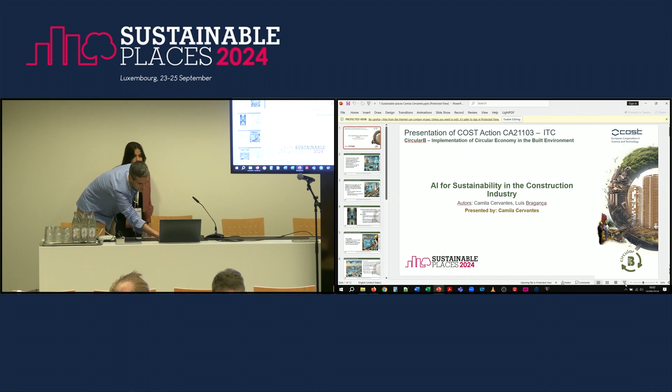Hello everyone. Today I am going to present AI for Sustainability in Construction Industry. My name is Camila, I am a research assistant at University of Minho. I am part of the CircularB COST Action too, so I am here for the cost action for circular economy in the built environment.

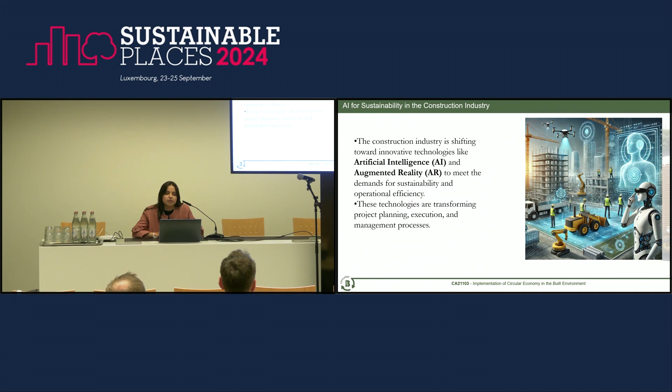The construction industry is now in development, and we want to join AI with AR, augmented reality, with artificial intelligence, to transform project planning and management processes in the construction industry. This study explores the integration of AI and AR, and the core areas are real-time visualization and the synergy between these two and BIM, which is now in development in the area of construction.

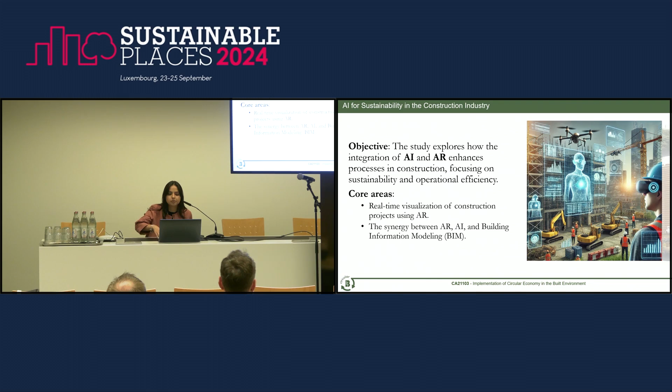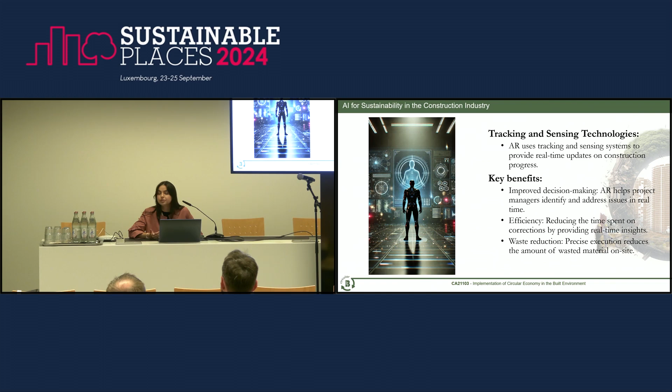The key benefits of this study we are developing are improvement in decision making. AR helps project managers, and efficiency reduces time spent on corrections by providing real-time information. We want to have waste reduction to change the construction industry, not to have problems, and we want real-time tracking of waste material on site.

Now we are talking about AR and BIM that create digital twins for construction projects.

Nowadays, almost all of us know this. How many people here are architects or civil engineers? So probably we know a lot about this concept of BIM. The idea is to combine AR and BIM, because BIM is a bit more like programming things, so I want this approach in AR because we are more visual, as architects. I am an architect myself, so it's more efficient to see these kinds of things with the architecture part, with the clients and the industry.

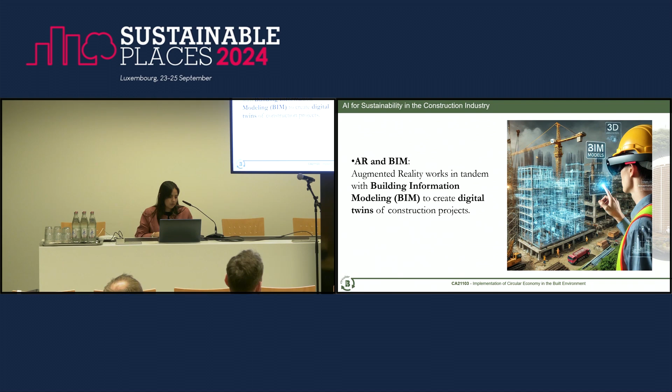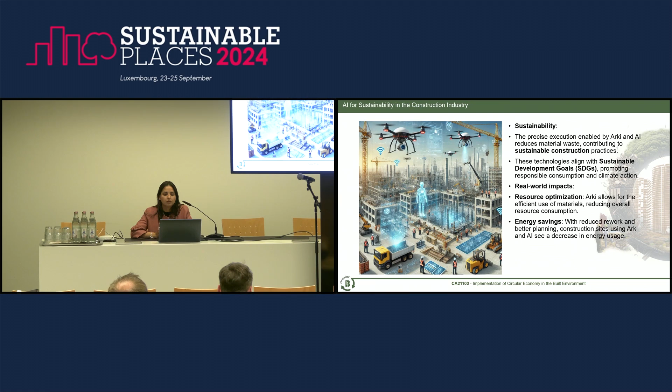The idea is to have an impact on resource optimization, which we will talk about regarding the app we are using. We will have energy savings with reduced rework, and we are always planning to align with the SDGs, which are now standard across Europe essentially.

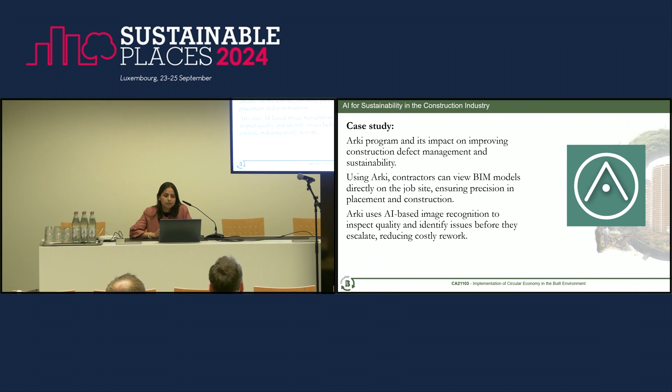Now we have a case study using an app called Arki, which is based on BIM, compatible with Revit or Archicad. Arki uses AI-based image recognition to inspect quality and identify issues before they escalate. This is how we plan.

In this case study, we can share this information with real estate so people can see the materials and things more clearly, rather than the IFC code and names and all the technical details. After that, we update that information back to IFC and bring it back into the BIM.

With this, we want to facilitate communication between stakeholders. Visualization in 3D models is easier for all people in construction and also for the client, so it can be more affordable in this sense. The algorithms that Arki has detect defects in this area.

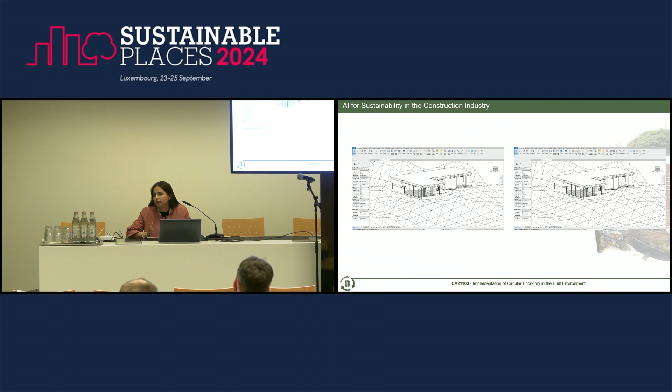This one? Yeah, I think that is the Revit one. In Revit, you mentioned that you use artificial intelligence. No, with this one, Revit is a program similar to Archicad, but the AI part is used to do this, because you need algorithms to do AI to generate this perspective render.

Because when you render things, you have to write the code. But for architectural work, I've been on the side of doing the architecture and putting in the colors and everything, but not working on the code itself. So when you add the code, it becomes more, how to say, complex, because architectural software has all the IFC, the code, and the program behind it. So the idea with AI is not to have to go into the code and change all of that to get to the IFC.

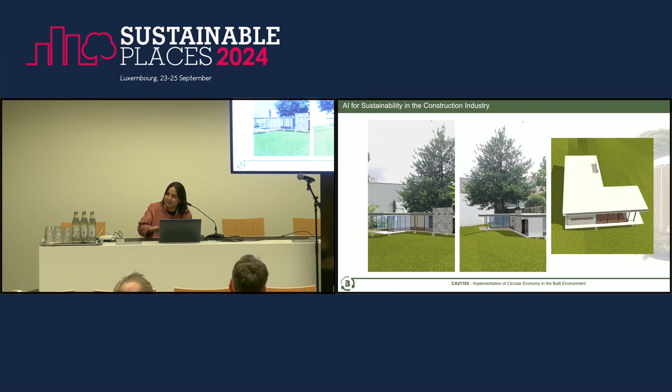Then we go to the second presentation. It's Clemens Mayer from Joanneum Research.

Good afternoon from my side. I'm Clemens from Joanneum Research, and I will show you today our project EBENTO.

First of all, a rough overview of my presentation. I will first talk about the objective and give a short introduction to the topic. Then about our EBENTO project in general, our EBENTO one-stop shop, and the digital tools we developed in it. Then I will go into details about energy performance contracting, one of the central parts of our EBENTO project. There I will first outline the basic typical energy performance contract, and then our EBENTO EPCs, where we also added flexibility services and comfort guarantees to the energy performance contract.

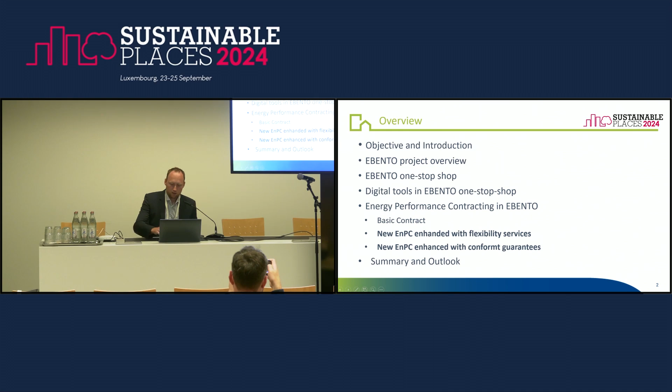So here's some facts that you might be aware of. The European building stock is responsible for about 36% of our CO2 emissions. Around 90% of the buildings that exist today will still be standing in 2050. Therefore, there is a strong need to decarbonize our building sector, and currently the renovation rates are too low to achieve climate neutrality, and therefore different approaches and ideas are needed.

Our EBENTO project aims to support building renovation through energy performance contracting. This is done by creating a one-stop shop with digital tools that support performance-based building renovations.

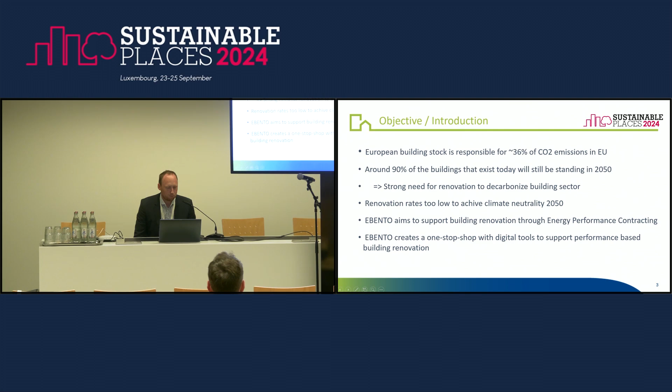The project objectives: first of all, the main objective is to develop a one-stop shop platform for all actors involved in the building and renovation sector. Then the development of digital tools for energy performance contracting management, which are the components of the one-stop shop platform. In general, the whole project always focuses on citizens, as they are the key player in energy transition.

So the one-stop shop should support citizens to do renovations. And also it should involve public institutions and energy communities by helping them identify potential buildings for renovation. And finally, the development of new innovative energy performance contracting business models that include flexibility elements and comfort guarantees is a major objective of the project.

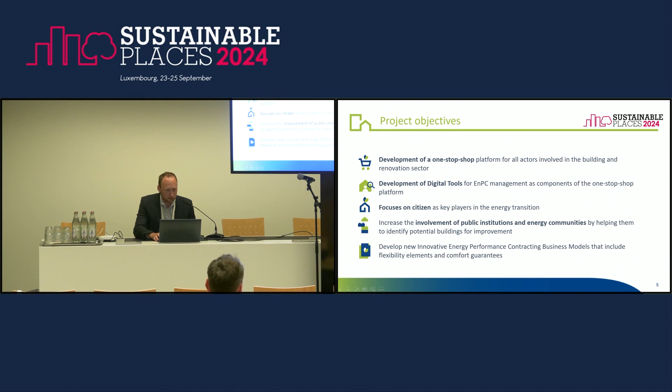The one-stop shop contains 3 modules. First, the building performance contracting module. This works as a logbook where energy efficiency certificates and financial information for different contracts will be stored, so it's somehow a decision support system. Contract templates are stored, and contracts could be created in this tool. The tool also supports contract management and control of the energy performance contract.

Then we also have the monitoring module, which supports monitoring of the parameters of the houses - energy, comfort, humidity, temperature, CO2 level. In the project, we defined a list of KPIs needed to evaluate the energy performance contract. And finally, we also have the simulation module, which consists of a physical simulation to calculate the energy efficiency of different measures, and also an economic simulation module where you can calculate the profitability of a renovation measure.

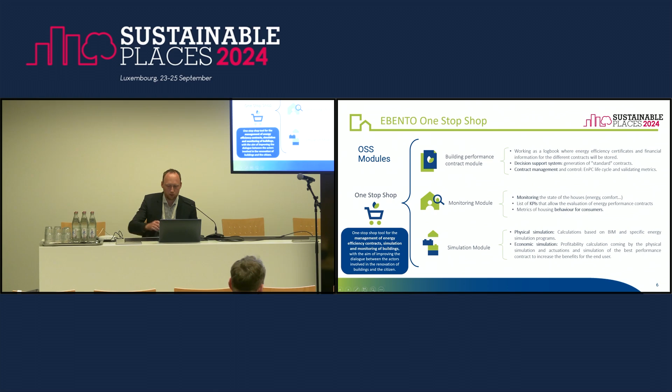Here's some details about each single component. In general, it's a unique platform with different roles for the management of energy efficiency contracts, simulation, and monitoring of the buildings. It also contains a dynamic map which shows the energy performance certificates for buildings in cities, helping public authorities identify buildings that could be renovated.

We have the monitoring module, as already outlined, which supports monitoring of the comfort and energy-related parameters of a building. We also have the energy and comfort simulation based on the BIM model. In general, it's a common space for citizens and companies, and the energy performance contracting management, control, and definition is done in this platform.

Okay, now I want to go into detail about energy performance contracting. So maybe a quick question: who has already heard about energy performance contracting? Okay, then I will go into deeper detail on that.

In general, it's a contractual cooperation between building owners and an ESCO, an energy service company. The ESCO and the building owner define, before doing the renovation, the baseline energy consumption of the building. Then in the energy performance contract, they define the type, volume, quality, and timeline of the investment and of the energy efficiency and renovation measures. The special thing in an energy performance contract is that the energy efficiency measures are fully financed by the energy savings, so the customer doesn't have to take on the investment - it's done by the ESCO, and it's paid back just by the energy savings. The ESCO guarantees the achievement of the agreed energy savings.

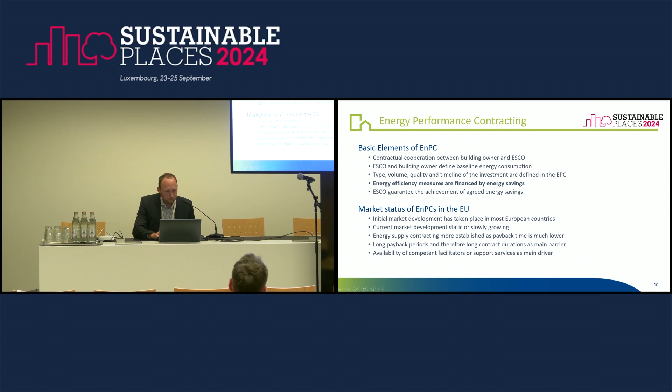The basic energy performance contracting business model, as already described before, is that the ESCO and the building owner define a baseline energy consumption, and they define which measures have to be undertaken.

After the contract duration, the customer benefits from lower energy costs. So then all savings are for the customer.

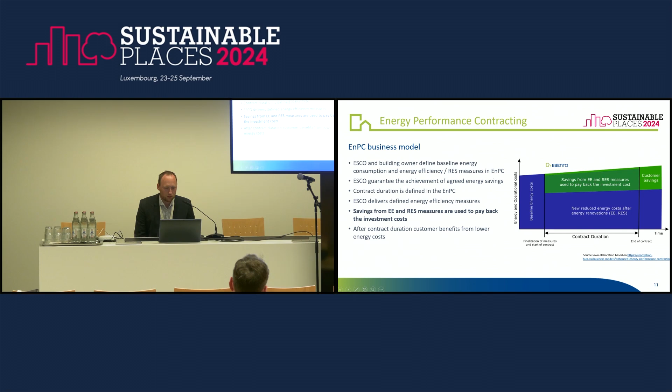The long payback times and the contract durations are the central problem of energy performance contracting, and therefore we try to also involve additional revenues and additional savings in the energy performance contract to reduce the contract duration and increase the profitability.

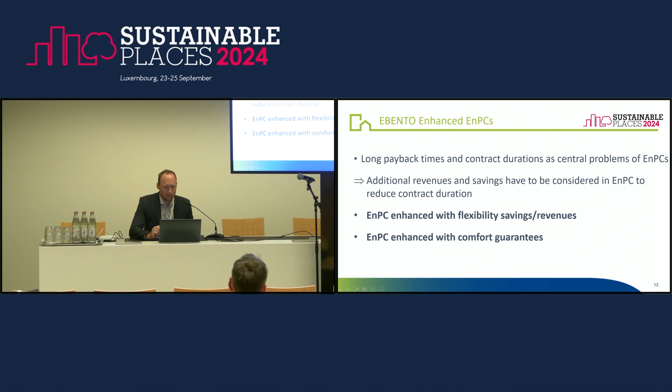There we defined two different topics: first, the EPC enhancement with flexibility savings and revenues, and second, the EPC enhancement with comfort guarantees.

EPC with flexibilities: the idea is that revenues from implicit and explicit flexibilities could be included in the energy performance contract to improve the profitability of the contracts.

Flexibility services of buildings could be defined into different categories. First we have the implicit flexibilities, which means that the demand of a building is shifted to times with lower electricity prices. So you have a price signal and then you adjust your demand.

This could be done if you have a PV system, so that you optimize your self-consumption rate in order to have overall lower energy costs, or if you have flexible electricity tariffs, you adjust your demand to those times of the day where the electricity price is lower.

If you do that with an energy performance contract, the ESCO has to manage the total building energy management system to control the implicit flexibility savings. If the ESCO is doing that, then you can consider those savings also in the business model, and shorten your contract duration.

But then there are also explicit flexibilities. This means that you shift your demand based on external signals from a network operator or aggregator, and there the ESCO could act either as an aggregator or as a contractual partner of an aggregator or grid operator.

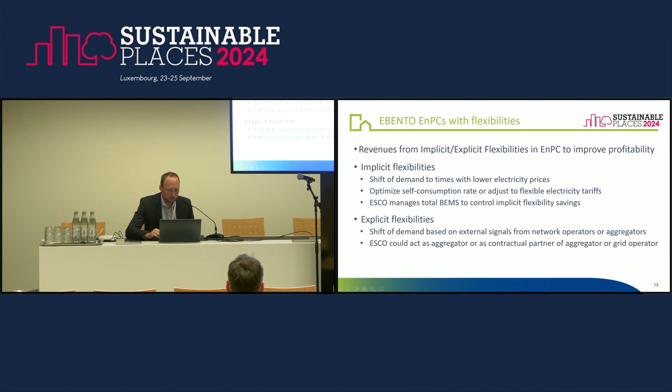And of course, it's always important that you install equipment during the renovation that you could use for flexibilities. For example, if you change the heating system to a heat pump, that's ideal, because then you can also use flexibilities later on, shifting the heat pump for the heating according to price signals.

You could also take the revenues from explicit flexibilities to pay back the investment costs, thereby again increasing the profitability and reducing the contract duration. After the project or the end of the contract, all savings are received by the customer, and all revenues from explicit flexibilities are received by the customer.

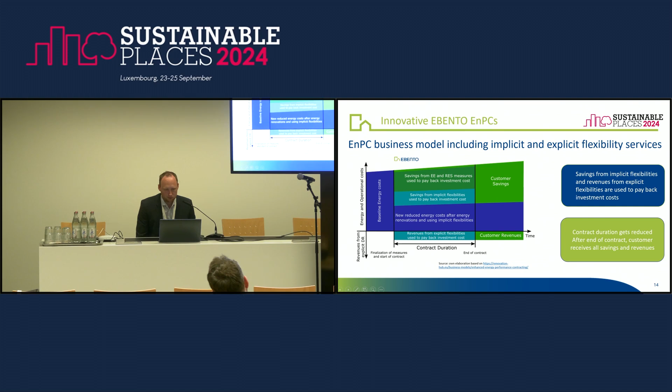We also looked at energy performance contracts with comfort guarantees. There is a growing market demand for contracts that offer guaranteed comfort. This means the ESCO not only does the renovation and provides the electricity, but really guarantees comfort levels—a guaranteed level of temperature, humidity, and air quality to customers.

This should be part of the contract. The ESCO is responsible for the continuous monitoring, control, and maintenance of the building energy management system, and takes full responsibility for delivery of the guaranteed functions. Thereby improved living and working conditions are achieved through better control of humidity regulation and air quality.

The assumption behind this business model is that customers are willing to pay an additional fee for the guaranteed comfort level—for the maintenance of this whole system. This operating fee, or willingness to pay, is again used to pay back the investment costs.

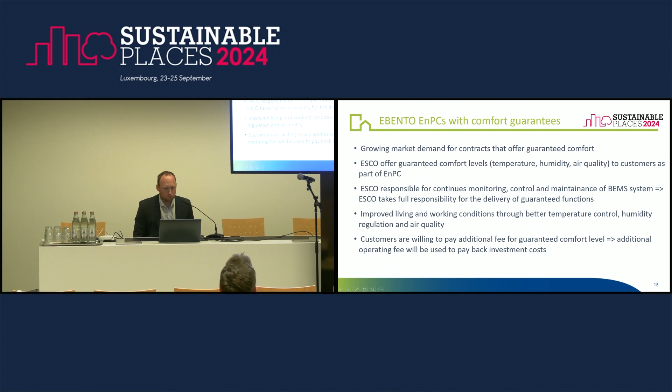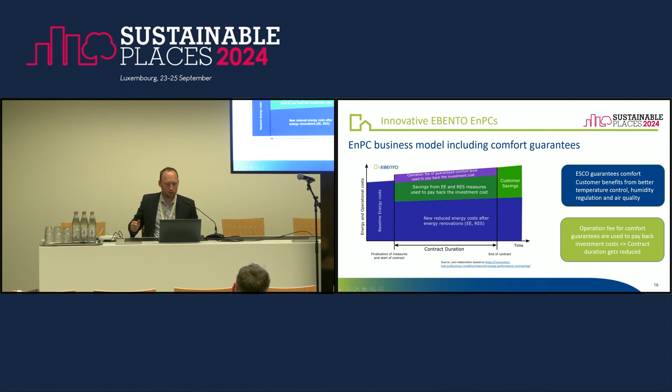So, a quick summary. Long payback periods and contract durations are the main barriers of energy performance contracting. EPCs with flexibilities or comfort guarantees could reduce the contract duration.

Our EBENTO one-stop shop supports building renovation with energy performance contracts through digital tools. We developed the monitoring, simulation, and contracting tools to better realize energy performance contracts. In general, this one-stop shop should support all actors involved in building renovation, and we will test it along with our new energy performance contracts in 4 pilots in our EBENTO project. Thanks for your attention.

Did you make a survey? It's based on... it's not yet implemented? It's not yet implemented, right. Okay, so how do you know or be assertive that they are willing to pay?

Yeah, that's a good question. We're looking for the answer too. At the moment we just did it based on literature research. Literature says that in general, guaranteed comfort or an increased comfort compared to the situation before renovation could lead to a positive willingness to pay. But indeed, it's very difficult to assess the height of this willingness to pay. So maybe we can align on that topic and compare your approach.

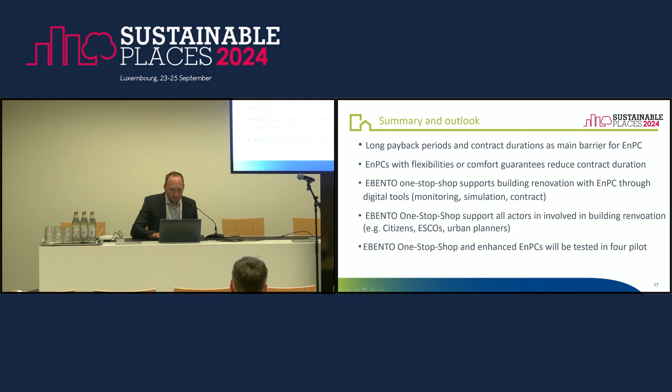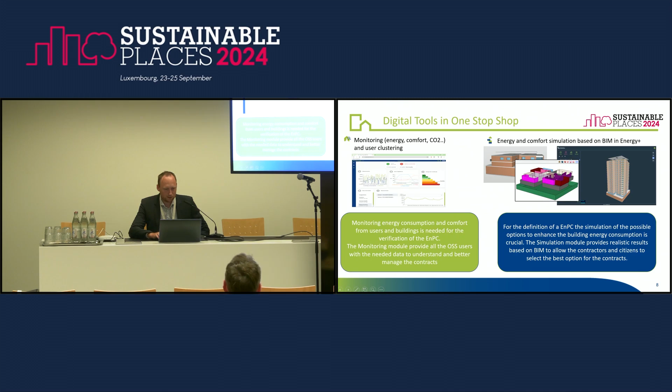Yeah, there we just have one tool in our one-stop shop platform, and this is a dynamic map. The idea is that we have a database of the whole city which shows the energy performance certificates, and based on that you can identify the buildings that are in need of renovation. This is one part, and the second part is the simulation module, where it's possible to estimate the energy cost savings and financial savings based on the measures you undertake. So you can combine different tools from the platform in order to find the buildings that are best suitable. You also mentioned a focus on the users.

How did you involve users? Do you have some co-creation sessions, or what's the approach to link users to the project?

Yeah, exactly. So we have co-creation sessions with the users of our 4 pilots. We had several co-creation sessions, because the building is partially owned by the inhabitants, and therefore we had several sessions to convince the pilots to do the renovation and also to install the monitoring equipment, because there you also have GDPR issues, so it's somehow an interference in their privacy. So a lot of co-creation is needed.

Yeah, perfect. And you have mentioned just the pilot. My last question was about this. If you had any pilot in which you are going to validate this approach, you can elaborate more about the pilots or provide some details on which countries.

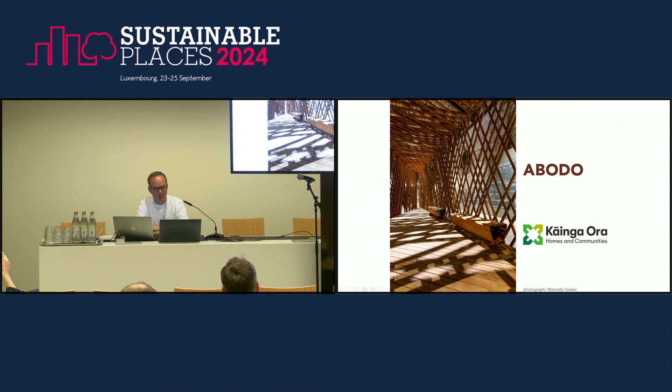Google them. And also by Kāinga Ora, who is the New Zealand government's housing unit. So, among other things on that project, I had more here.

I designed and built four benches, each 1.8 metres long. They were configured in the space to variously offer rest and articulate the space in and around the pavilion, and invest the whole with a kind of tactility, a lustre or a glow.

There's a pattern milled into the surface of that timber, which you'll see in more detail in a minute. That was developed from photos of patterns left by receding tides in the black sands of Auckland's west coast beaches. So again, there's this imprinting of material, a place on material, and relationships in there.

Now, the timber for the benches had come from a demolished state house, from the 1940s or 50s, built out of sticks essentially. But that timber, the weatherboards on that house, was cut from kauri trees perhaps 500 or 1,000 years old. That's not a renewable resource. To me, it's like treasure, which is why we took so much time with it.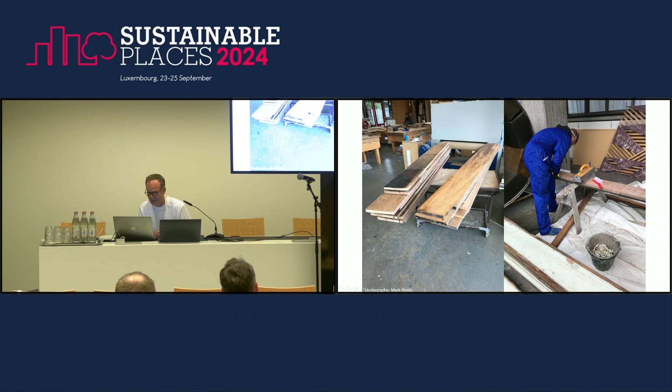The manner in which the timber was received, the sanctity of purpose to which it was put, has enabled a healthy relationship between institutions. So Mapihi, the Māori Pacific Housing Research Centre, now has some agency in that sizable housing market, in part because of that relationship formed through the gift of a small amount of what we collectively know to be precious material.

In form and material, the benches recalled waka, or traditional timber canoes or vessels, and also hollow log drums of the region. But they also honour the maritime history of their Venetian hosts, and we've told that story very effectively. The project has won all sorts of acclaim and continues to be published. A really tiny project, like a nothing kind of project, but it's had this really big impact because of the relationships it established and what those relationships are enabling.

So putting this idea of the relationships or the networks first, and expressing shared values through the exchange or circulation of materials, that works even between institutions. In this case, between the University of Auckland and the New Zealand Government Housing Agency.

That's where I'll leave it, just to outline the position. This way of doing things is key to embedding any measure or mechanism focused on change in our region. It's in this way Mapihi is positioned to leverage existing social systems and cultural networks to deliver ideas of decarbonisation and circularity in the building industry in the Pacific.

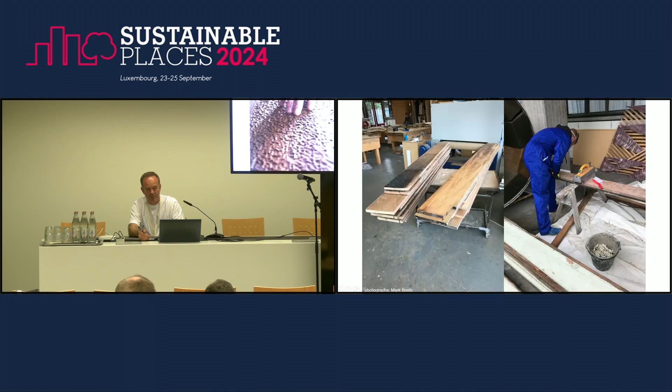Do you want me to go back? Sure. The idea is to use them as urban furniture, or for any purpose, to see how they worked in the space. I'll just go right back to the beginning - is that okay? So there's two inside the pavilion, and these two outside. They were moved around constantly, just to refresh the space. Yes, that was what they did.

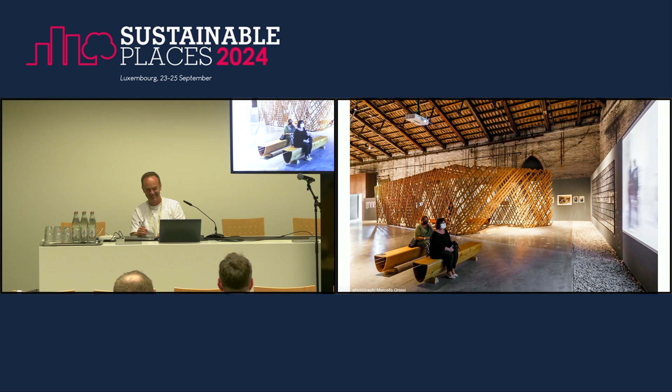Now in the collection of the curator of the Italian pavilion's family, Alessandro Melis. So yeah, thank you, thank you for having me.

Yeah. Do you need to talk into the mic? Yeah. All right.

Yeah, so this one's interesting enough, small enough project. I won't go into too much detail. I'll keep it pretty top level just to keep some interest in it.

Essentially what we have here is a new European initiative that some people might be familiar with, which is the SRI, or Smart Readiness Indicator. So we obviously have EPCs that most people are familiar with, which is energy performance certificates. The SRI is like an elaboration on that. It's bringing in smart technologies to improve or optimize the systems and buildings for the occupant. It's mainly focused towards energy, but there are other elements to it that are interesting as well, and that's obviously important for the occupant.

So this is a Sustainable Energy Authority of Ireland project. It's a national project focused on the city of Limerick, which is about, give or take, 150,000 people. So it's a small city on the west coast of Ireland, close to the Atlantic Ocean.

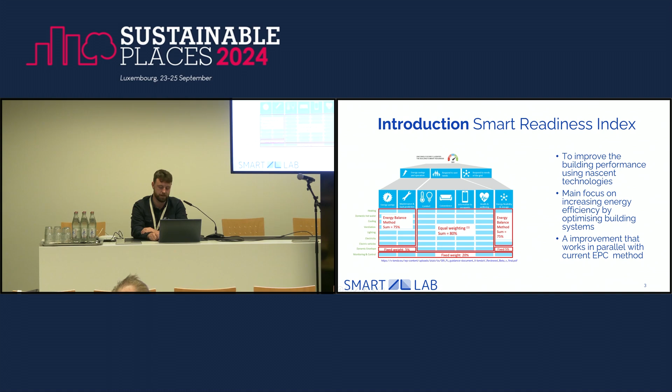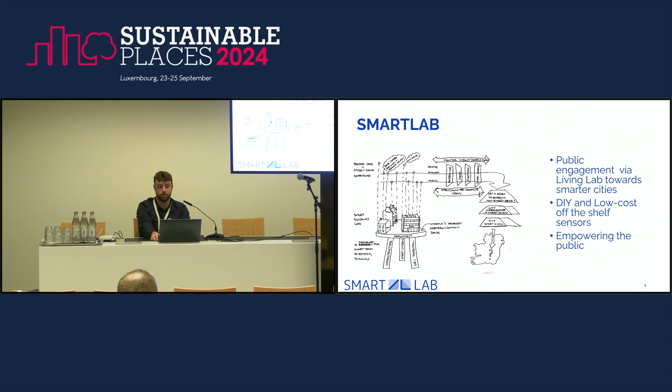So Smart Lab set out to see how people would take to this in general. The project was essentially a living lab approach, where we quite literally had, in the middle of the city, an open door policy on one of the university buildings, where people could just walk in and look at different displays, like dashboards for the city showing energy and IAQ values, and look at sensors and information on the SRI. So it was an interactive space where they could come and go as they pleased, with curators there managing the system, or managing the lab.

We made some assumptions. The project was 2 years running, it's just finishing now. So we started off really quick, and we assumed that people cared about money and cared about energy and cared about free stuff. We just made really bad assumptions about the public in general, because that's the kind of mentality we had going in, I guess.

And so we focused on sensors that would look at energy more so, and energy savings. This all kicked off around the same time as the Ukraine war, when energy prices started skyrocketing. So our bias went towards people trying to save rather than anything else.

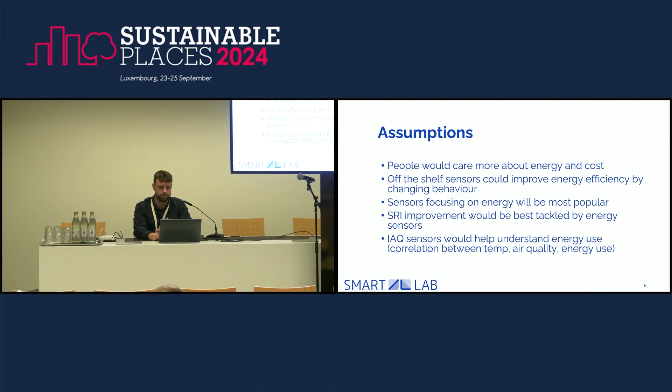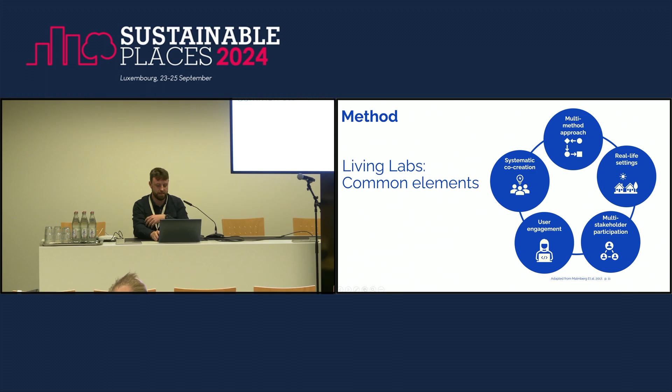The living lab approach - this is generically how a living lab works. It's a multi-method approach in a real life setting, in the middle of the city, multi-stakeholder. So we had social scientists, local civil servants, and then people like me, and in the next slide you'll see someone called Keen, who were the tech experts discussing the different elements of how the SRI works.

We had residential and non-residential participants as well, so it was just anyone who walked in. We had pub owners, a local museum, and I don't know what you'd call it, like a monastery I guess, a religious group, something like that. So there were all sorts of people and characters to meet.

So in IES, we developed these custom dashboards to make it as simple as possible. A simple smiley face or sad face traffic light system, thumbs up if your energy is under the average, thumbs down if it was going above. Just really simple stuff.

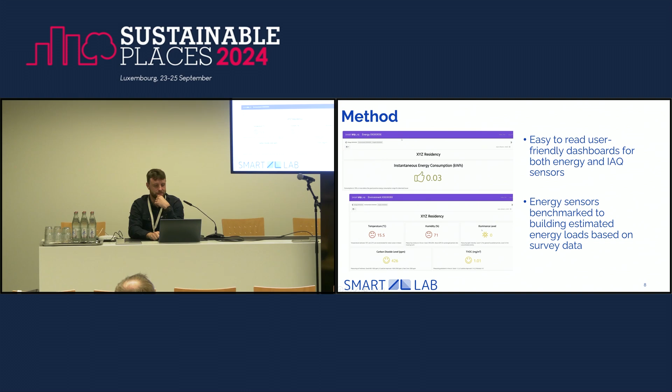So in the end, we got 59 buildings that received sensors, 35 were non-residential, 24 were residential. We actually had a social housing unit of apartments that took part, but we isolated that data for now, so it's not part of these results. Over 160 sensors were installed.

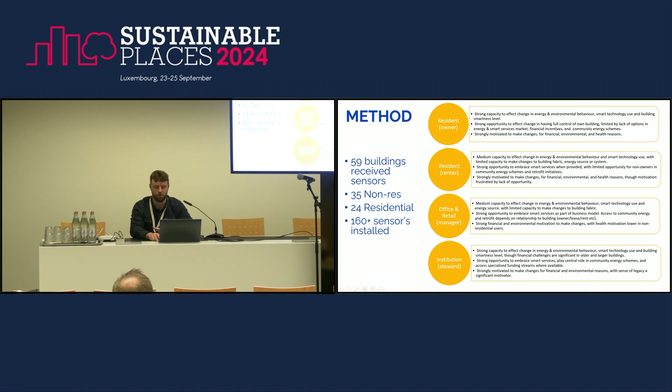So obviously I discussed the SRI, so we wanted to see, first of all, how people reacted to the sensors and what their interpretation of smartness is, and then we also wanted to see what's the physical impact on your SRI. Going with the physical impact first, we're taking an archetypical building from Limerick, which is residential.

They're roughly 100 years old, solid red brick. If you watch any British drama to do with living in East London or Manchester, that's the type of buildings they live in. So that's what you imagine in your head.

So these buildings essentially were all 0% on an SRI score. They weren't smart. The best automation they had was a timer on their heating system to kick in when they wanted the heating to start. So when we gave them out these really clever sensors, we managed to bring it up to 8%. So still a G, doesn't really do anything.

So we thought we might tick more boxes, and the way we used them with the software, we thought we could reach out more. Technically, you can push the percentage up based on fault detection, but that's heavily dependent on software and how you apply it to the sensors.

This is the use case where we go with the off-the-shelf sensors that are easy to install as well, so it's DIY. They don't do much in terms of improving your SRI.

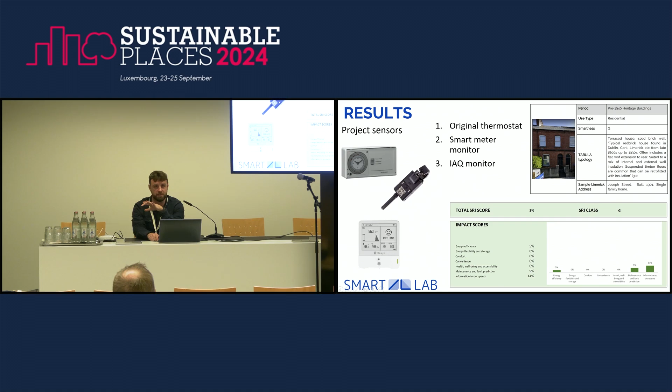So we took an archetypical case again, and we hypothetically added different sensors that were moderately cheap, what we call low-cost sensors, but you would still spend up to about €1,500, which isn't that cheap to get these installed. These buildings use gas boilers, so fossil fuel, and you'll see the fuel breakdown in a slide or two.

And so we thought, okay, can we hack the old system? That old timer, can we actually make it a bit more advanced? And can we make the domestic hot water more advanced? We focused on energy because the SRI gives a favorable weight to energy efficiency over indoor air quality or other features.

So in this building now, hypothetically, it can communicate with the grid because renewable curtailment on the grid could be pushed into the hot water tank. The top left sensor can receive a signal from the grid and say, hey, I want to take that renewable energy that's going to get curtailed. We're just going to heat the hot water tank, and then in the morning, the occupants can have a shower that's basically for free.

And then with the other sensors below, that's basically taking the old valves off your radiators and putting in new ones that will automatically shut and close based on the temperature and how they're programmed by the software, which is on your phone.

We took a lot of liberties with technology, but basically said, in theory, you can make this house communicate with the grid, have fault detection, and have building automated control essentially through their mobile phone. But that only brought us from a G to an F. So it's really difficult without spending lots of money to really improve the SRI.

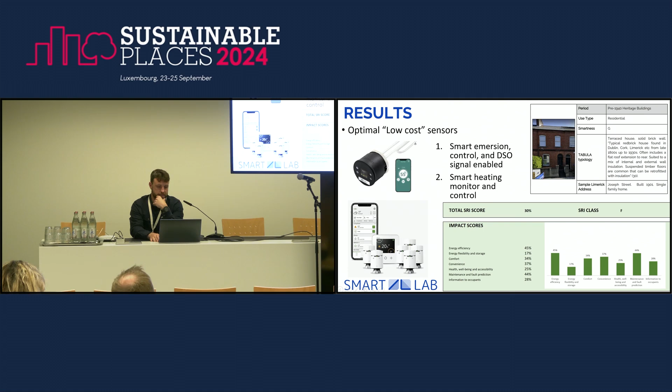So this was some of the findings we had with the SRI. We had a lot of debates about what's smart, such as if you put smart plugs in, you just plug them in the wall—is that making the building smart, or is that just something the occupant owns that's smart? If they plug their radiator into that, and that's how they heat their building, is that a smart radiator or not? Technically, everything can be removed, but then do we include light bulbs or things that could be removed, like smart bulbs? So we had a lot of conversations around this.

And we kind of settled on: anything that's difficult to steal would probably be part of the house, and we could say that then it's part of the smart house. So an F on a building, going from a G to an F, is actually a lot of smart functionality in a lot of ways, but there are so many different areas of function.

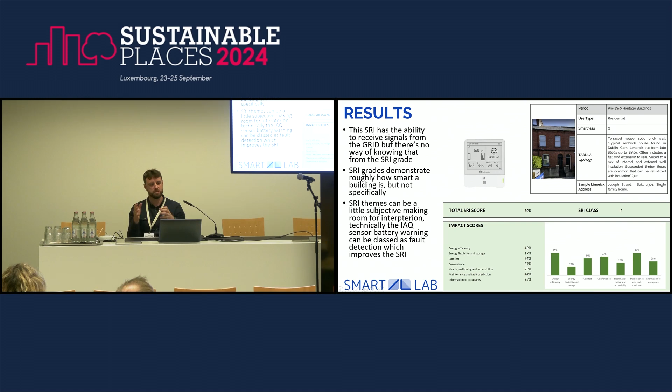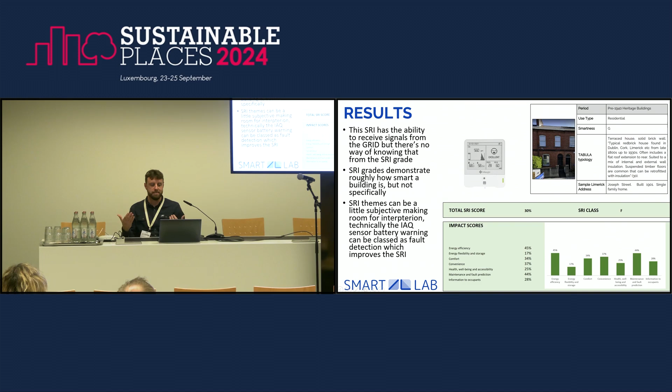So there's a dynamic envelope where the building can actually open and close based on signals. And we were like, an F score could mean a smart heating system, or it could mean a smart envelope. So they had these different themes, and we weren't really sure if it's a good way of illustrating how smart a building is by just giving it a grade.

So essentially, here's the discussion. Some of our assumptions at the start - we thought the participants would be real misers and be like, we're all about saving money. But they were actually most interested in indoor air quality. They were really curious about their actual living situation. In some cases, participants said they increased their energy bills in order to have better indoor air quality.

For those who aren't familiar with the west coast of Ireland, it is very damp and very moldy. So people wanted the warmth and the dry conditions, and they were really interested to see how they interacted with the interface. People didn't like the dashboards because you had to access through your phone and go through a link - it wasn't really user-friendly. But the IAQ sensors just had a smiley face on the wall, so you'd be in the kitchen, look over, see a sad face, and figure out why. It was better for the general population to have something right there.

And then we had a few gray areas around the smart bulbs, smart valves, smart plugs. Which one's part of the house? Which one goes with the person?

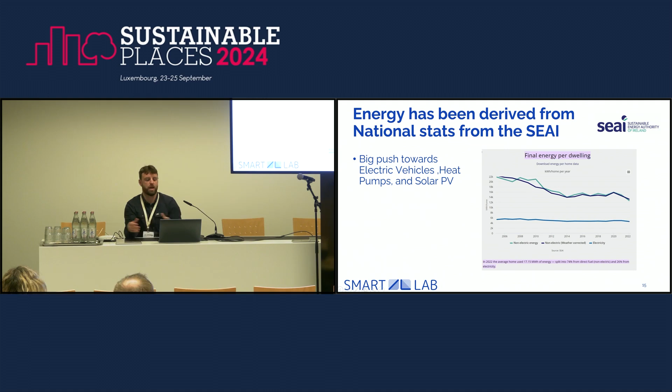That's actually the people who participated in the project, but it's also a statistical representation of the city, because that's what we see in the census. Nearly 75% of heating energy in homes in Ireland is directly fueled by fossil fuel, with only a small percentage having electricity. So we're trying to swap that to 100% electric by 2050 with heat pumps.

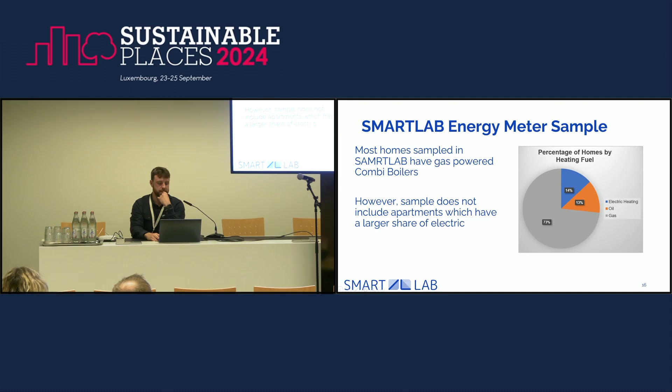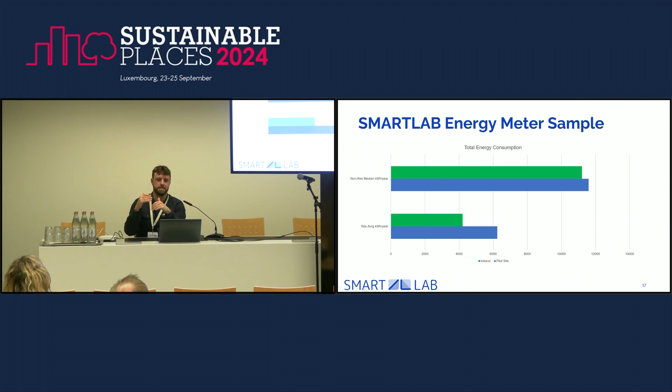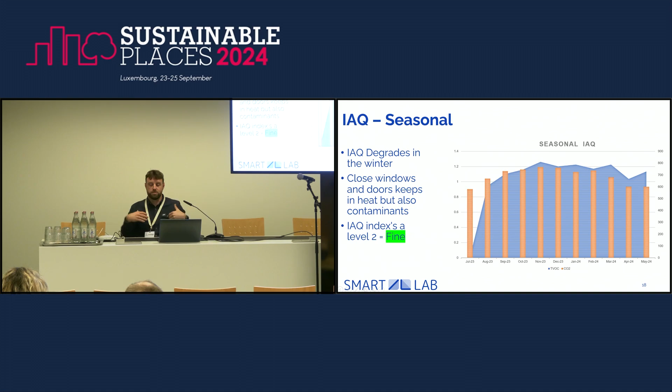But what was interesting is that we see the indoor air quality degrades in the winter and then improves during the summer, because people are trying to keep the heat in, so they close the windows. There's more CO2, there's more TVOCs, and they're just more interested in keeping thermally comfortable. So it just degrades over the winter but improves in the summer.

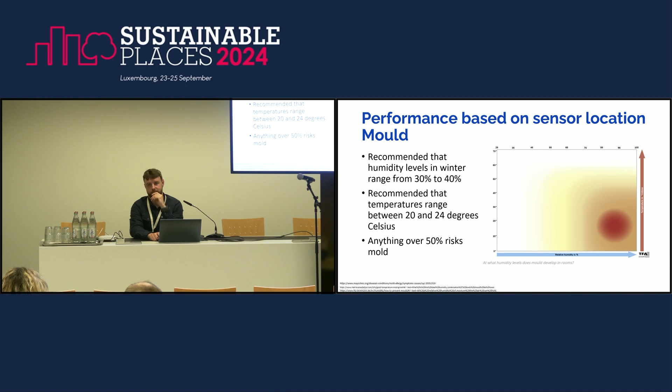And the last one, very relevant for Ireland, is mold. Mold is anywhere basically where humidity goes over 50% and the temperature stays below 20 degrees, so you have a good risk of mold then. We just took sensors from a random sample across random buildings with each room - one's a pub, there's a few offices, open plan offices, kitchens, hallways.

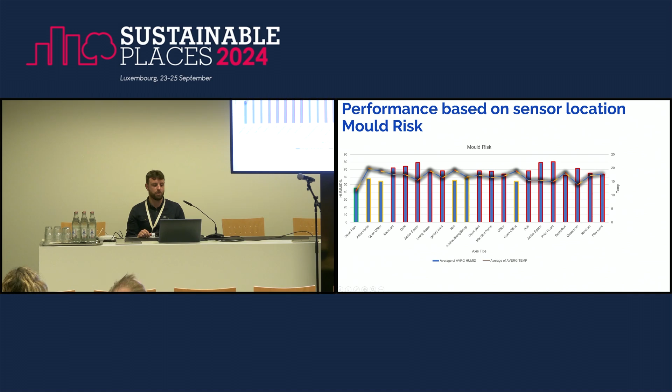Every single one of them is a high risk of mold in all cases, no matter what you do, except for the first one, open plan - but it's so cold in there, we think that might just be a lobby, something other than somewhere someone's living. Really interesting stuff - we see it across both residential and non-residential. This is just all the averages from all the sensors that went out. You can see they're all over 50% all the time.

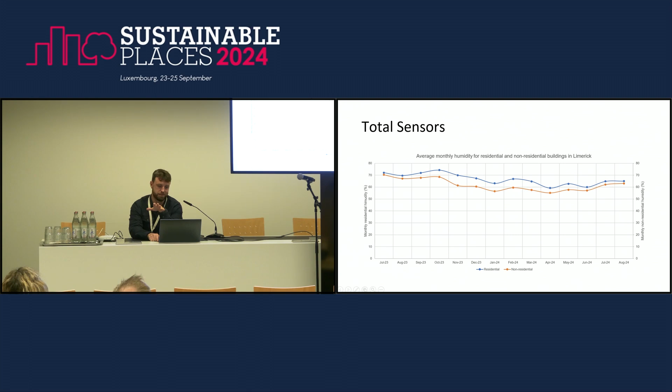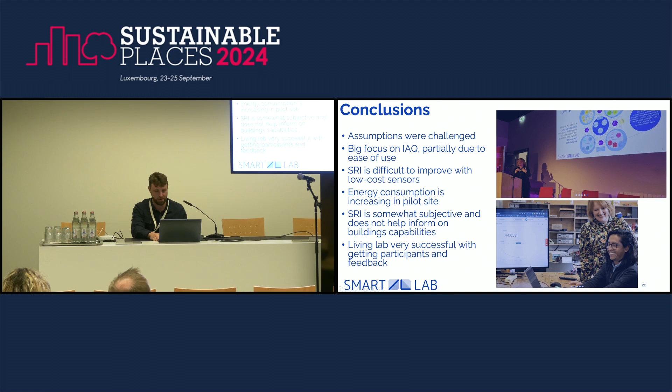For me, I'm often always with experts who have opinions, but it's just great being on the ground talking to people. It makes you rethink how you talk, because when I started, I was like a scientist with all these complex words - I was insecure and needed to show how smart I am. Towards the end of it, you're just having fun with people and talking about stuff that makes more sense. So it was a brilliant tool to use in projects, and I'd strongly encourage it if you're thinking of writing up a consortium and want to start something where you want to impact the ground - get a Living Lab going.

My email's there for questions, but my colleague who worked in the Citizen Science Lab with University Limerick, Dr. Madeline Lies, I'd consider her one of the foremost experts now in Living Labs in both Ireland and probably in the EU. She's just back from New York giving presentations - in the US they're interested in setting this kind of stuff up as well. So if you want someone to give you a hand, take her email down - she'll be a great asset to any project.